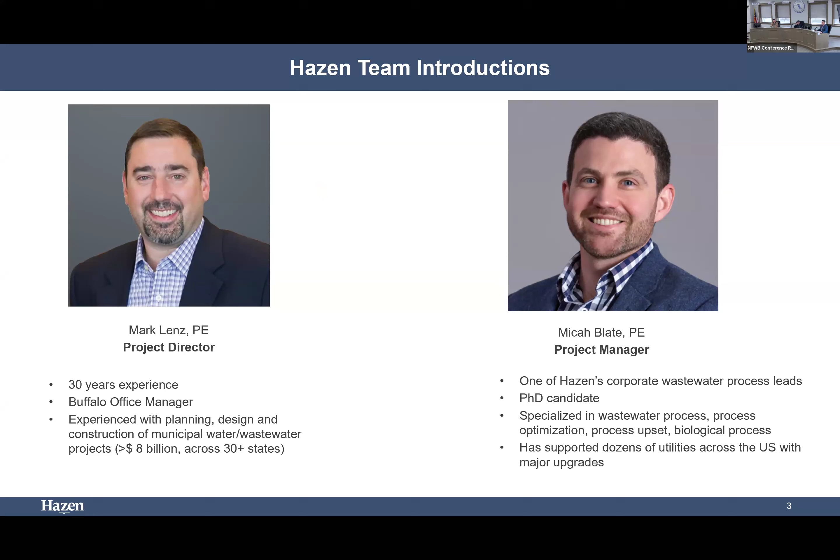Just a little background on Hazen. We are 2,200 people nationwide. All we do is drinking water and wastewater work. So the whole company is filled with people who are doing projects very similar to this across the country. Moving forward onto tonight's discussions. If you click forward a couple slides, in terms of the overview, just from the schedule perspective, Micah will talk about the overall project, but we've reviewed all of the existing information that was compiled over the last 8+ years, which was very useful. There was a lot of hydraulic modeling done as well as mixing modeling to help identify solutions here.

We did bench testing, really appreciated the opportunity to work with your staff, both in the collection of those samples as well as using the lab space to analyze them. Hazen also maintains a lab on Manhattan University's campus, and so some of the more specialized testing was completed there as well. All of that resulted in an alternatives analysis. The report is sitting in front of Sean, so you can see it's quite lengthy. And with that, I'll hand it over to Micah and he'll talk through things so that you don't have to read the whole report if you don't want.

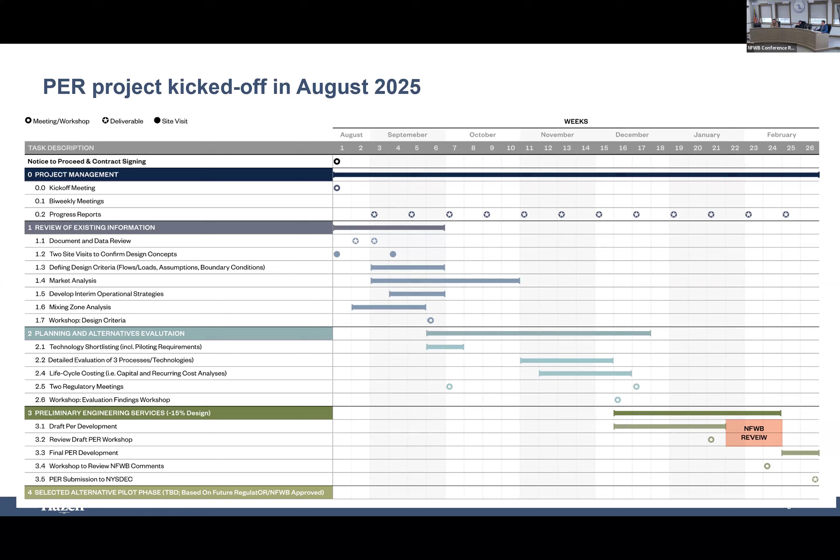All right. Thank you, Mark, and thank you everyone for the time this evening. So like Mark said, we started the project in August 2025, working towards submitting the document there in front of Sean in late February. So the primary challenges with the wastewater treatment plant today are, one, there's two influent sources of varying quality and flow. So pollutant loading and flow are quite different. The sulfide cycling, which we'll spend some time discussing here in a few slides, is challenging and causes the visible contrast. The wet weather peaking leaves no redundancy, so how many units we can take offline is challenging during wet weather peak conditions.

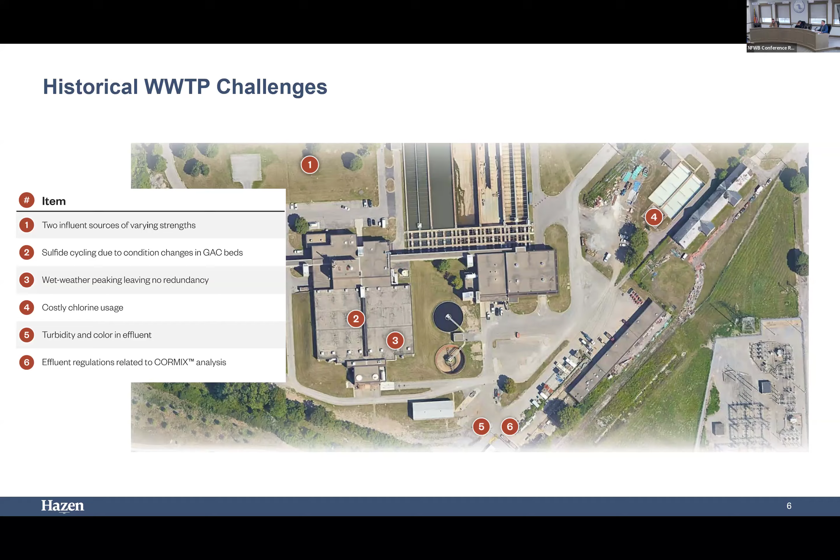Chlorine usage, which I have a slide on at the end of the presentation, has gone down significantly, but historically, it has been quite expensive. Of course, you all are aware of the turbidity and visible contrast in the effluent. And we'll talk about the CORMIX at length here in a few slides.

As you all are aware, the consent order has some major challenges with it. The existing facility is a physical chemical treatment facility, meaning that it does not currently have biochemical oxygen demand limitations. The new permit has that limitation, in addition to many other parameters of varying quality and type that warrant some major improvements. So in addition to the BOD addition to your permit, a number of other things have been added.

Total sulfides is a new one. Dieldrin and cyanide are also new. But in addition to that, the DEC has proposed decreases in some other water quality parameters, namely WET testing and PCBs, along with changing the frequency the parameters should be tested.

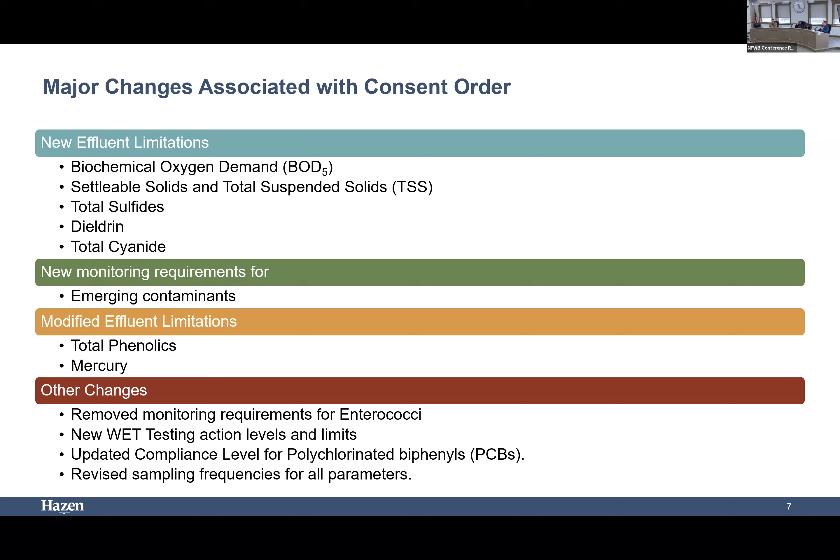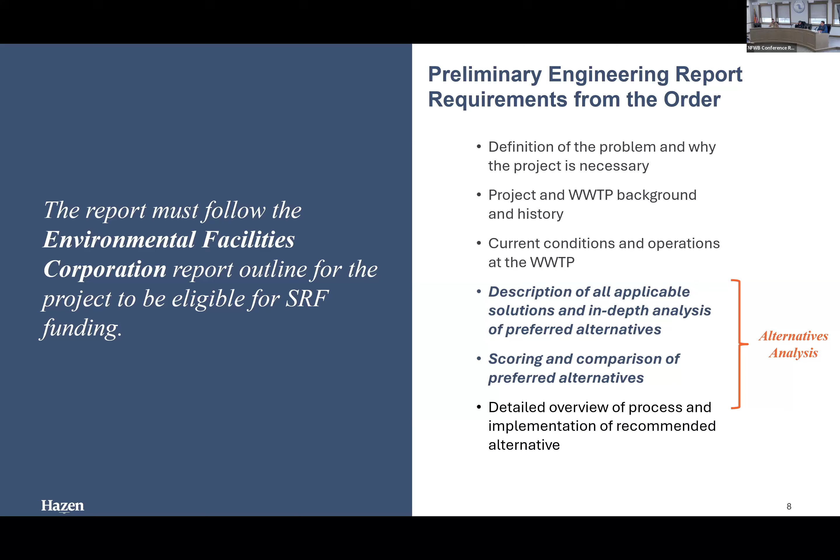So the preliminary engineering report was stipulated from the consent order to contain certain things. You can see kind of the outline of what was required in the PER. What we'll spend a lot of time on today is discussing the alternative analysis, how we went through the analysis, ended up on 3 alternatives, and finally recommending a single alternative. So we'll work through this together tonight.

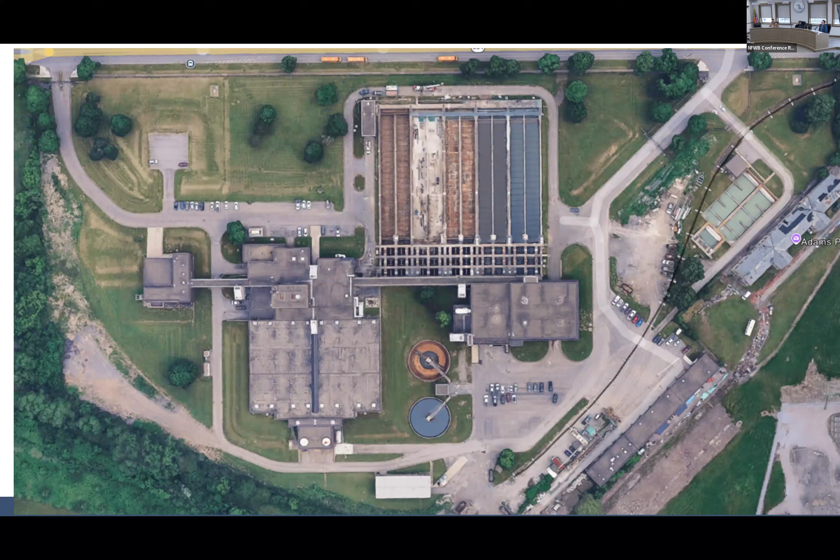Like I said, we submitted the report February 27th, a few months ago, to the DEC, and we're just awaiting comments from them at this time. So this is a current aerial of the wastewater treatment plant. What we are proposing is what's called a moving bed biofilm reactor. It's moving really slow, sorry about that. Coupled to a disc filter.

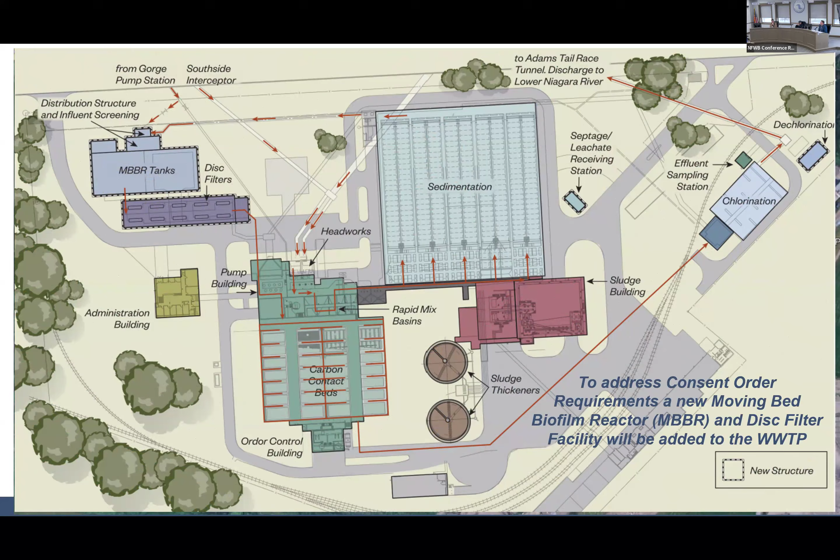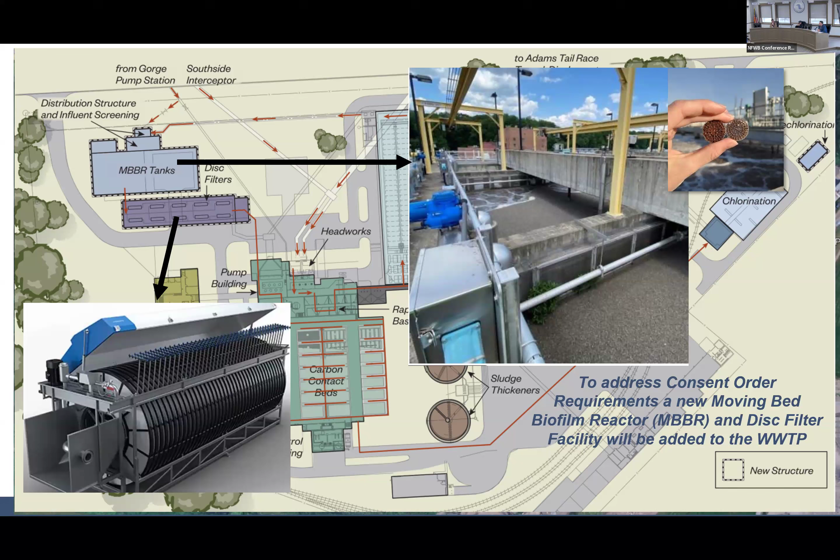So you can see what it would look like in the future. MBBR on the top left of the screen, followed by what's called a disc filter for solid separation. And just kind of popping up from there is the MBBR tank. You can see there's some little waffle looking things. That's what the microorganisms grow on, and it goes inside a tank that looks like that. And that's a picture of what a disc filter is.

So jumping right into the project details, we broke this up into 3 phases. Phase 1 was what we call just a baseline understanding, getting to know the plant, understanding what's already been done. Like Mark mentioned, there's been a ton of work already done, so we had a good starting point. So we reviewed historical information, conducted staff interviews, went through 4 or 5 years of historical data, did a condition assessment, development of design flows and loads. CORMIX modeling is a big piece of this. We'll get to that in a few minutes.

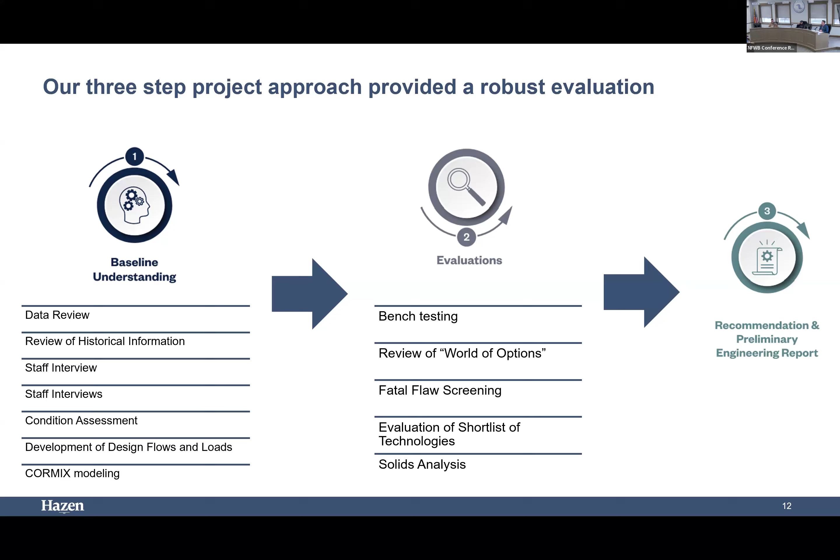Phase 2 is where we had a big list of what we call a world of options of technologies or processes that we kind of refined down to the final analysis to make the recommendation. Okay, so there's been a ton of work already done. So thankfully, we had a great starting point. Most recently, AECOM had done a 2019 report looking at basically the biodegradation potential of the influent wastewater, and that ultimately recommended a membrane bioreactor.

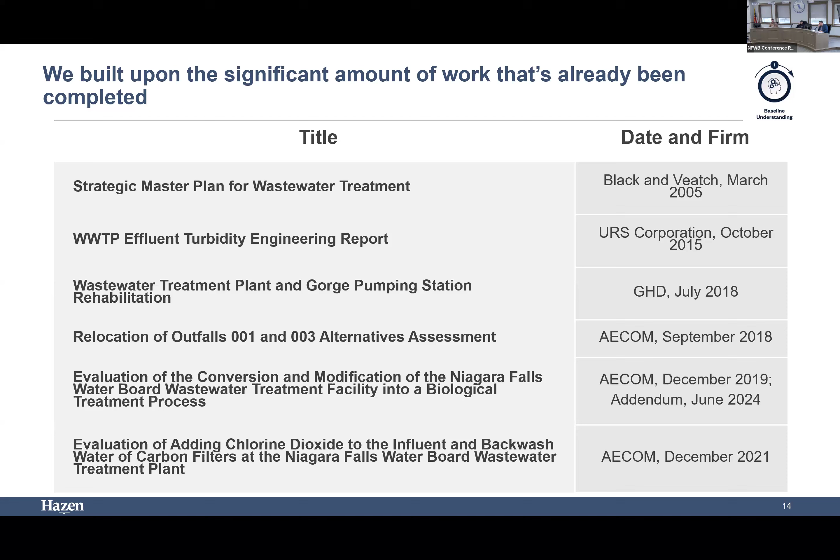And a number of other studies as part of the consent, but even going back to the early 2000s, Black and Veatch had done the strategic master plan for the wastewater treatment plant. And we used a lot of this information. I mean, we built on what Black and Veatch did, a lot of the alternatives that they had defined. We kind of looked at those same alternatives. So interesting to build on what's already been done.

The draft SPDES permit does require maintaining the granular activated carbon beds. This is a huge deal. Firstly, like I mentioned, this is a physical chemical treatment plant. There's no biological treatment intentionally happening. So we need to add a biological step to get rid of the biochemical oxygen demand as step one, but we also need to get rid of a number of other parameters.

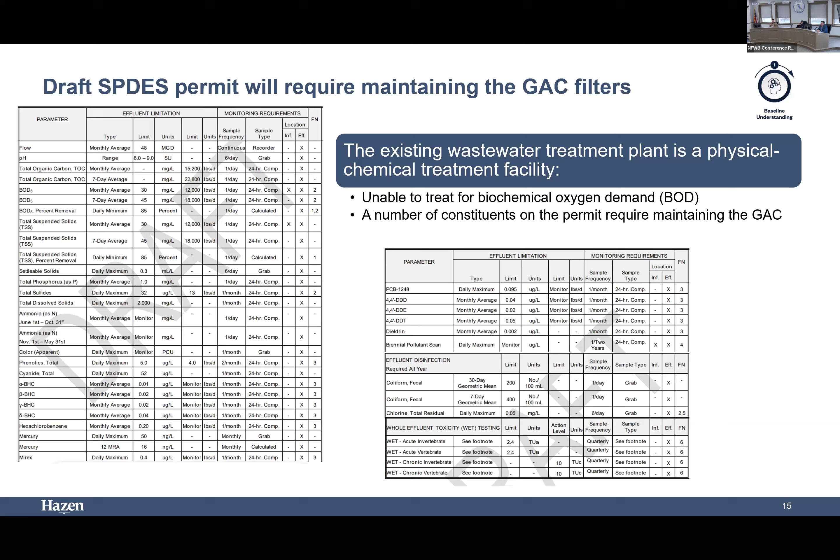And this is really part of the foundational understanding of the plant. You know, we don't want to over-design the plant. We don't want to under-design the plant. So this is one of the building blocks as we start building this project. What is the basis of design going to look like? So this is a key part of what we do.

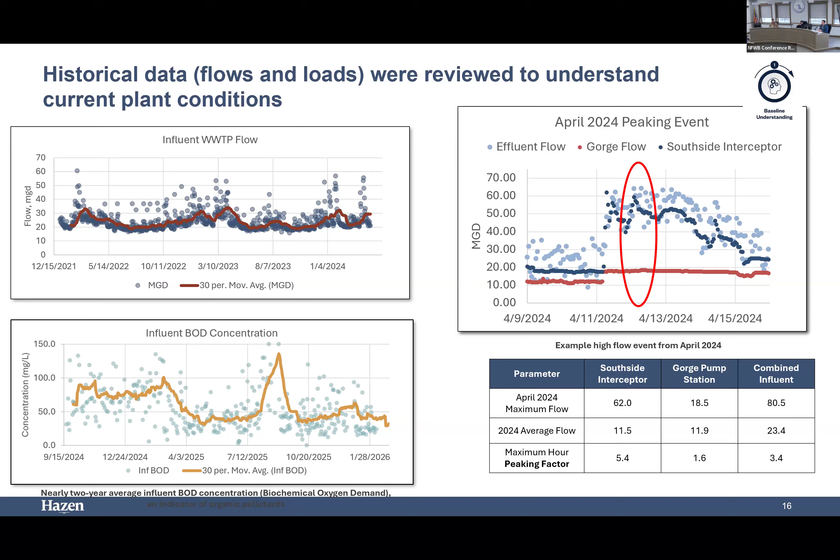Did I? Try it one more time. There we go. Oh, there it goes. Okay. Oh, oops, sorry. Two more times. Sorry. Okay.

Okay, so like I mentioned, there's two influent sources. One is pumped, which is from the Gorge pump station. It's the Gorge force main. And then there's a gravity influent sewer. So this is a key point of this exercise and this preliminary engineering report: the fact that these two influent sources are so different.

So that makes sense. The other really challenging part of this is the fact that the gravity influent sewer is significantly stronger from a pollutant perspective. So that's a good and a bad thing, because on one hand, we're able to leverage the fact that one's weaker and bypass some of our treatment system. On the other hand, we have this gravity influent sewer that's stronger. So what infrastructure is required to treat this because it is stronger?

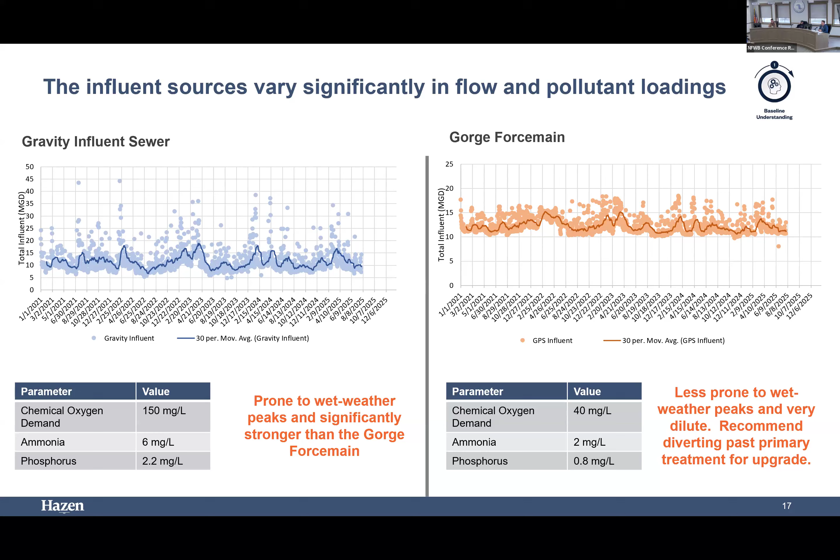So in addition to all of the data and information that we reviewed, there's also a number of parameters that aren't typically analyzed by the plant. So we performed multiple weeks of special sampling with the Niagara Falls Water Board staff. Thanks to the staff for supporting that effort.

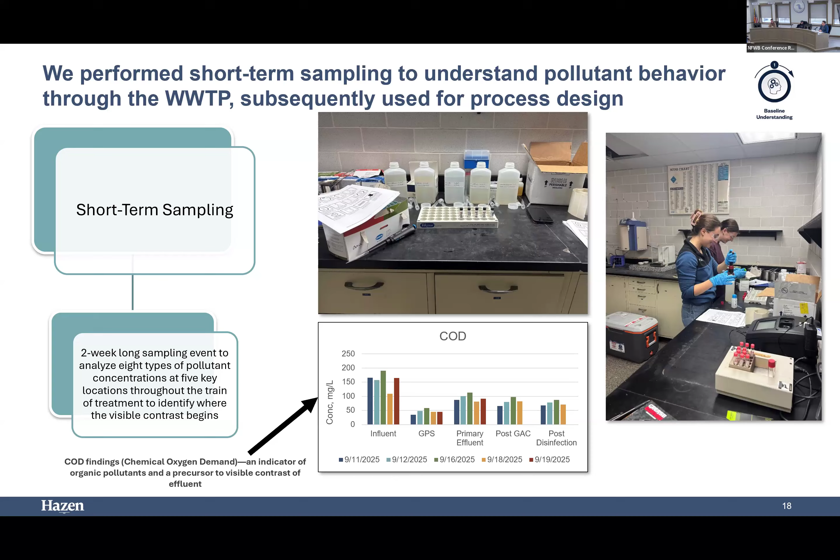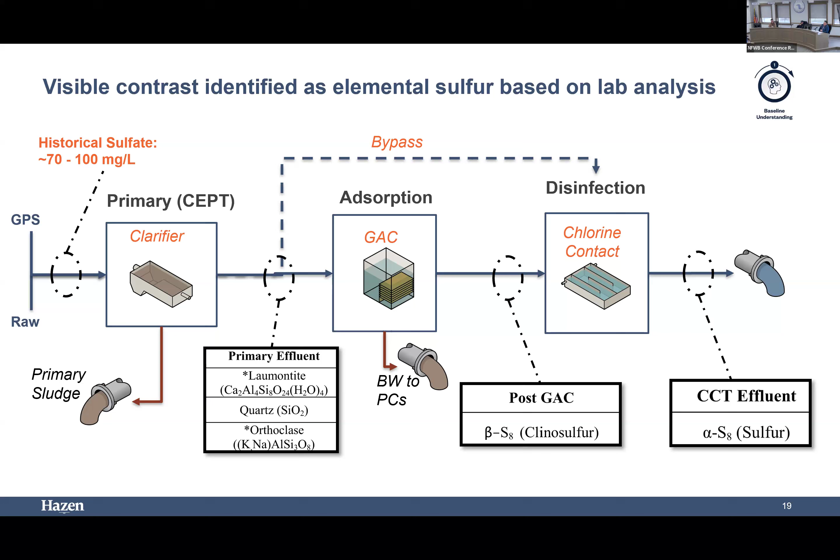So one of the key things that we really wanted to understand is what is causing the visible contrast? Why is the color so different from the effluent compared to the Niagara River? So ultimately we collected samples throughout the plant at a few key locations. Here you can see them. Don't worry about what it says, but ultimately we collected three key location samples,

and what we found is that the GACs are going what's called anaerobic. They run out of oxygen, and it's producing an environment prone to grow what's called sulfate reducing bacteria. And what this bacteria does is it takes influent sulfate and reduces it to sulfides. And if you recall from the SPDES discussion we had a few slides ago, total sulfides is now proposed on your draft permit.

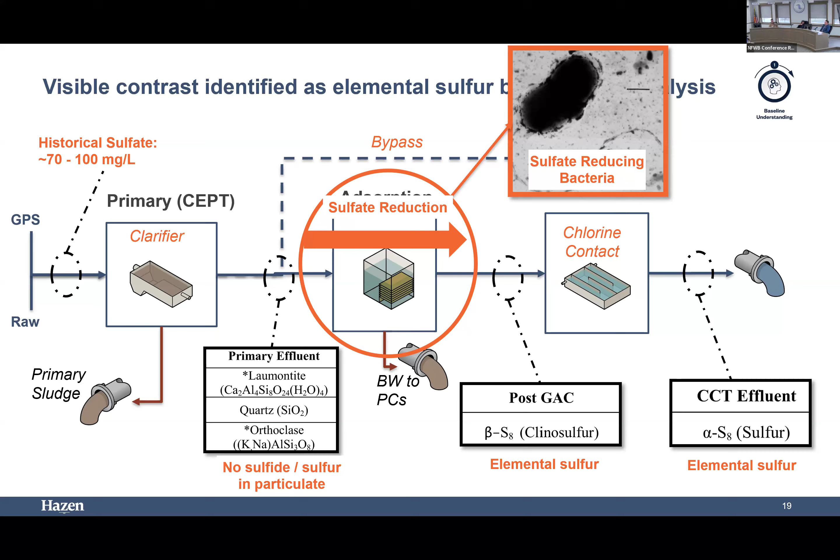So what we found is that in the influent you have some sulfate; as it goes through the plant, it remains as sulfate till it gets to the GACs. The sulfate reducing bacteria then convert it to sulfide or elemental sulfur. And you can see the color of the visible contrast in the chlorine contact tanks in that case.

So these sulfate reducing bacteria are interesting organisms. To grow, they basically require an environment with no oxygen and carbon availability, so they need carbon to grow. And unfortunately, influent wastewater has carbon. And obviously it requires sulfate. So how do we manage this?

Number one, we need to maintain an aerated environment in the GACs. Number two, we need to treat the carbon that goes into the granular activated carbon beds, so we need to bring the pollutant loading down before it goes into the GACs. And finally, we have the potential to reduce sulfate going into the facility by implementing sulfate on the IPP, industrial pretreatment program. Another way to reduce the potential sulfate reduction is reducing how much sulfate comes into the plant.

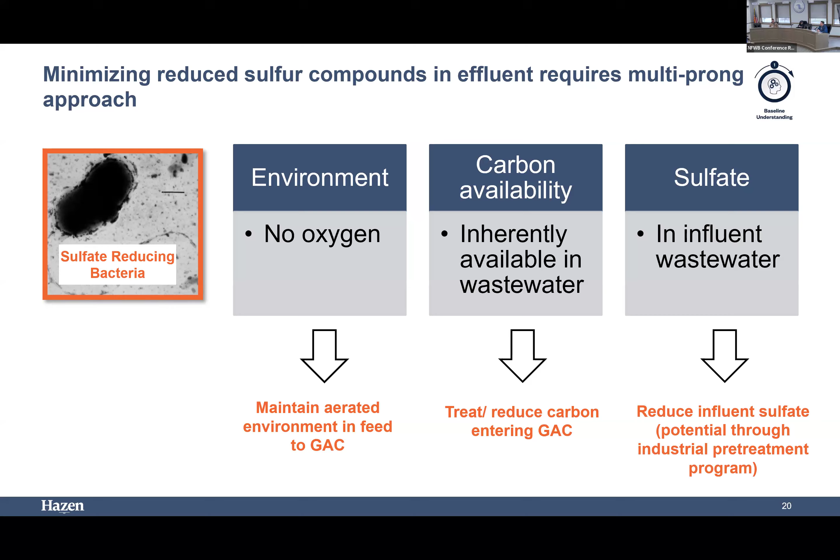Another thing that we did is a condition assessment. And this is really important because we wanted to identify deficiencies to be coupled to the major upgrade at the plant, because you don't want the rest of the plant to be falling apart while you have this major upgrade. So the idea was that we identified deficiencies throughout the plant so that they could be included in this project, so everything's starting at the same point.

So I won't talk through each one of these, but we looked at each system: primary treatment, intermediate pumping, and carbon treatment. And a couple key things that we found are the GAC beds need replacement, so all that carbon needs to be removed and replaced, and some other pumps and stuff. But this is all included in the costing because, like I said, we want to make sure that you have a plan that's going to serve Niagara Falls Water Board the best in terms of providing a long-term holistic strategy.

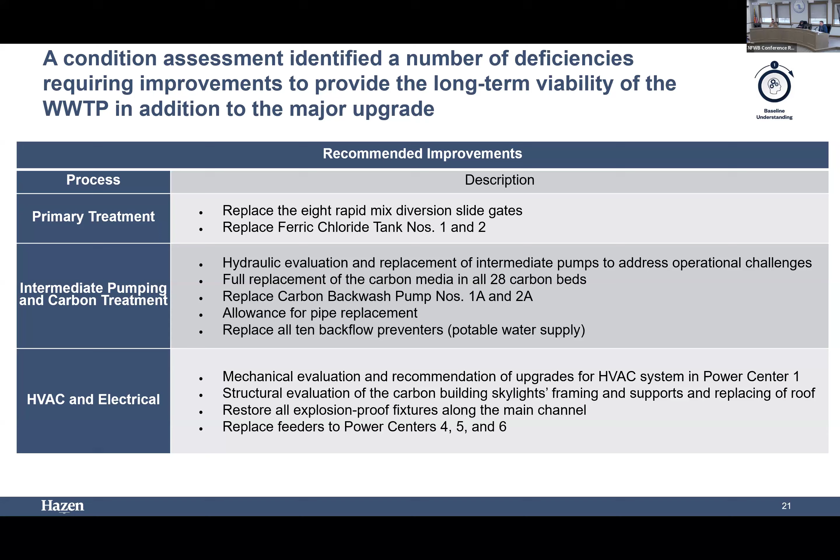Another few big challenges associated with this model: number one, there's a number of assumptions made on velocity and cross-sectional area of the river, which impacts how much dilution you get, which impacts your BOD, your WET and other parameters. So they use these assumptions to identify a number of these parameters.

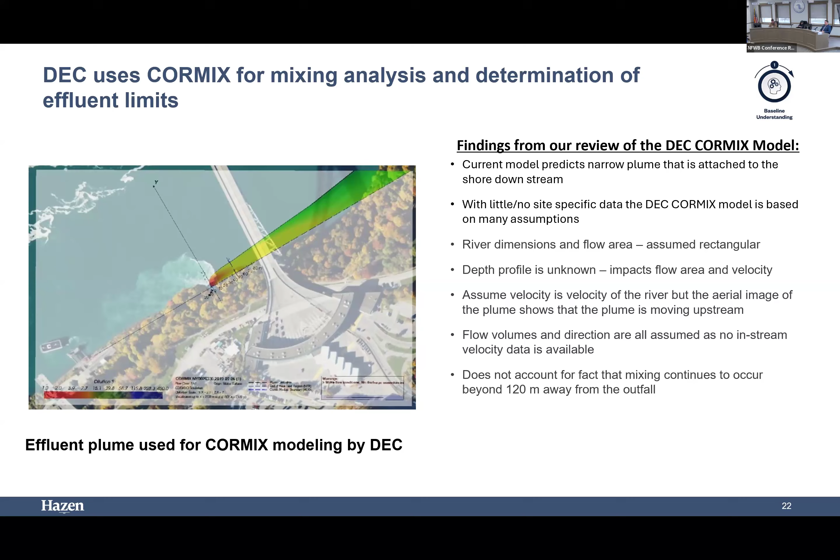And so what we did is we took their model and we updated it. So you can see on the bottom left is the updated CORMIX model. So now it's going upstream towards the falls. And we took Google Earth. On Google Earth, you can go back in time. So we took a couple snips back in time, 2002, 2015, and 2023. So for the last 25 years or so, the plume's always gone upstream. So number one, we wanted to make sure that we captured that in the updated CORMIX model.

And then we used some of the same assumptions and did some sensitivity on the DEC's assumptions in terms of velocity, depth, so on and so forth, to look at what the updated dilution factors would result in terms of total residual chlorine and the WET updates.

Maybe explain what WET is. Oh, okay. So WET is a test that looks at whole effluent toxicity. It's basically the toxicity of the effluent in relation to organisms growing in the river, right? So you can see there's vertebrate and invertebrate. So based on chronic and acute dilution factors, it basically looks at how things would be impacted in the river. So the permit requires this testing to happen, what's called WET testing.

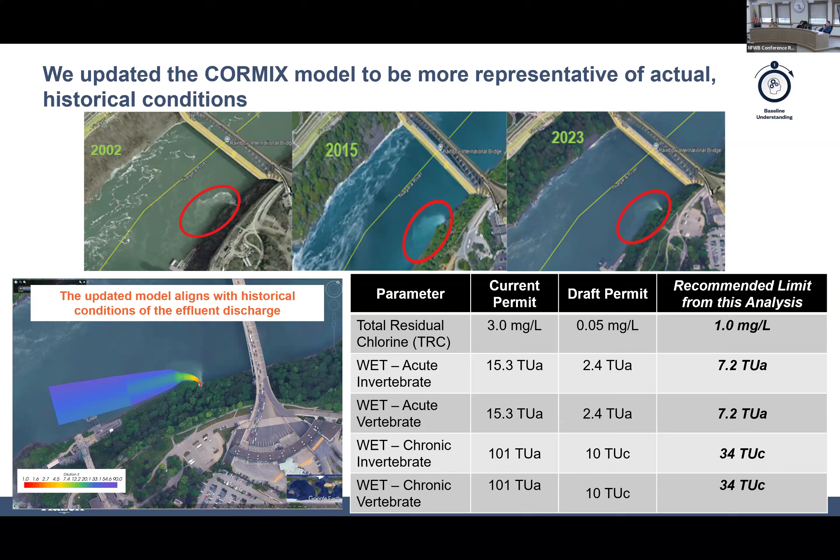So anyhow, your current permit has a 3, for example, on the total residual chlorine, 3 milligrams per liter. The DEC on the draft permit has 0.05 milligrams per liter, which is effectively 0. So our analysis recommends a TRC limit of 1 milligram per liter. And we did the same thing for each one of these parameters based on the updated modeling.

So the primary findings from this phase of work that we move forward with into the next phase of work are, number one, the 2 influent sources have very different characteristics. Number 2, the CORMIX model was used and updated to identify new recommended SPDES permit limits based on updated dilution factors. You need to maintain the GAC filters because of the industrial components in the wastewater, and elemental sulfur is responsible for the visible contrast in the effluent.

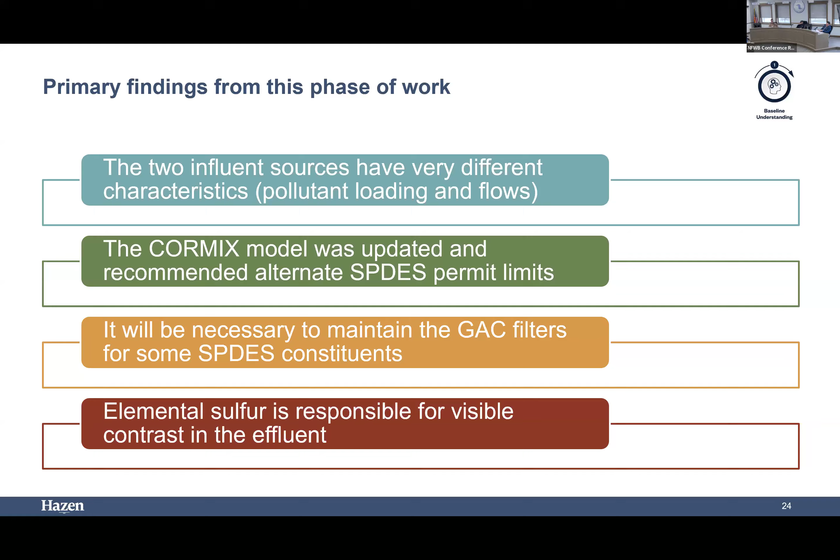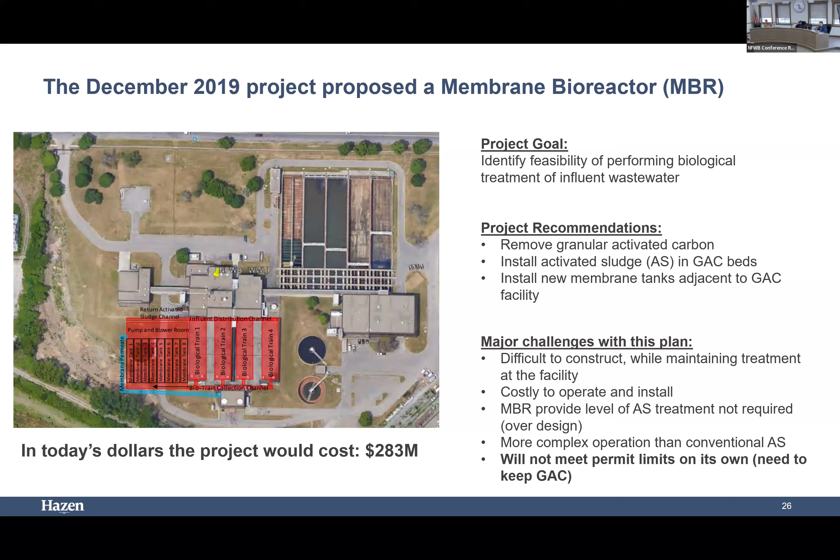You can see this is going into an operating facility. So it would be challenging to construct this while maintaining your current treatment ability. It's going to be costly to operate and install. And membrane treatment provides a really high level of activated sludge treatment that's not required for your permit in terms of nitrogen, phosphorus, so on and so forth. And it is quite complex compared to what you have now.

They're a great technology. It produces a very high quality effluent, removes nitrogen, phosphorus, total suspended solids, and it allows you to operate at an intensified level compared to conventional treatment strategies. So you're getting a lot done in a smaller footprint.

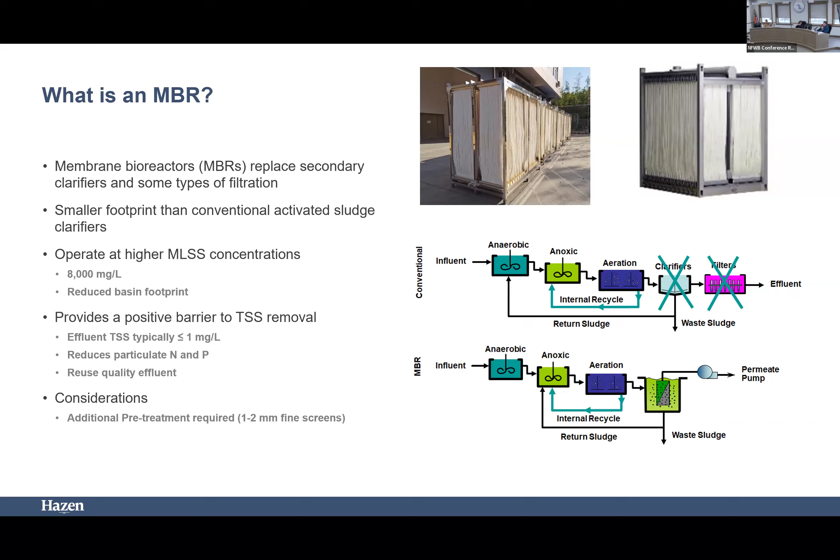There are some challenges. There's a lot of pumping, and you need a lot of additional equipment, cleaning equipment for the membranes. You have to clean them periodically, and you need fine screens. So a lot of challenges and maybe unnecessary for what we're looking at, since there are no nitrogen phosphorus limits, only biochemical oxygen demand.

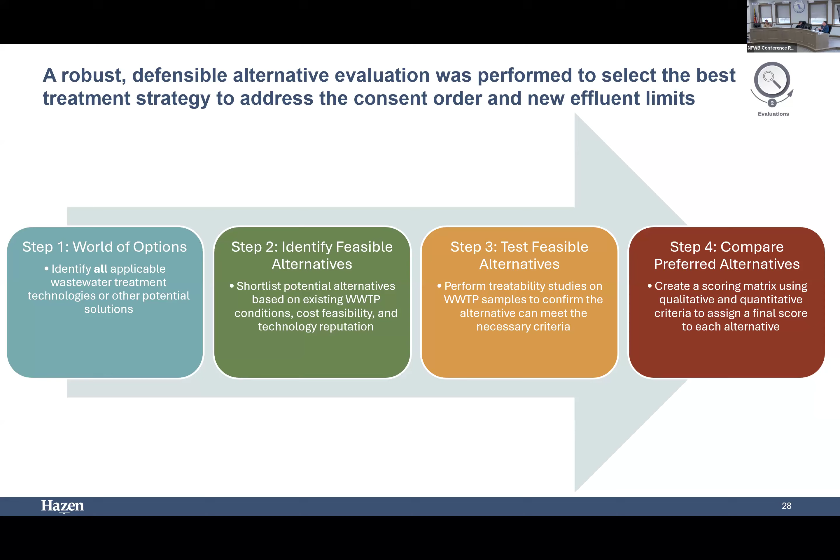So we came up with a strategy to provide a robust and defensible alternative evaluation to identify the best treatment strategy to address the consent order. I mentioned the world of options. We'll walk through how we shortlisted that and got to the final alternatives. We did some benchtop testing at our lab. Mark mentioned we have a lab at Manhattan University. So we sent some samples to the university, did some benchtop testing there, and then we did a whole modeling, desktop evaluation, costing, life cycle analysis of these technologies against one another.

We started with what we call the world of options, and we put them into buckets. So bucket one is what's called the physical chemical treatment. This is basically expanding what you have now. Right now you have physical, the primary clarifiers and the GACs, and you have chemical, you add ferric to the primary clarifiers. So bucket one is just expanding that to meet the BOD limits.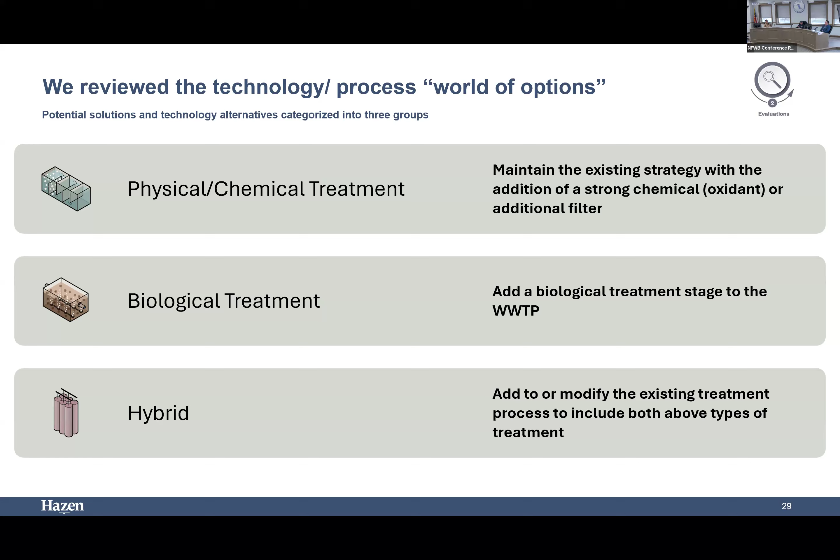The second bucket is biological treatment. And finally, the third bucket is a hybrid where we combine the physical chemical with the biological to potentially reduce new infrastructure requirements. So each bucket had multiple technologies. Physical chemical, we have a chemical oxidant. You all are familiar with chemical oxidant. You currently use chlorine. Chlorine is a disinfectant, it's considered a very strong oxidant. Membranes and ion exchange fit into that bucket.

Biological treatment, we'll talk about these in more detail, but there's a number of different ways to achieve biological treatment: activated sludge, biofilm, enhanced primary treatment. We'll talk about most of these, and then a hybrid strategy where we combine a membrane with a reject water treatment.

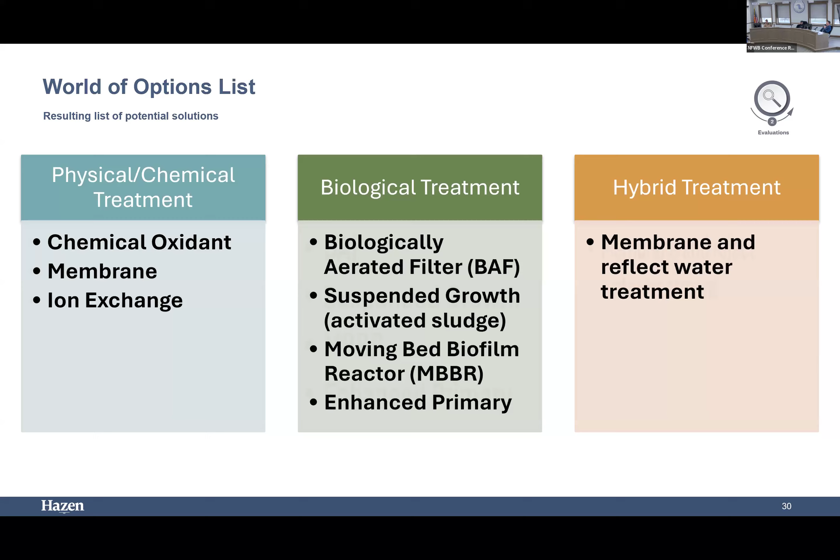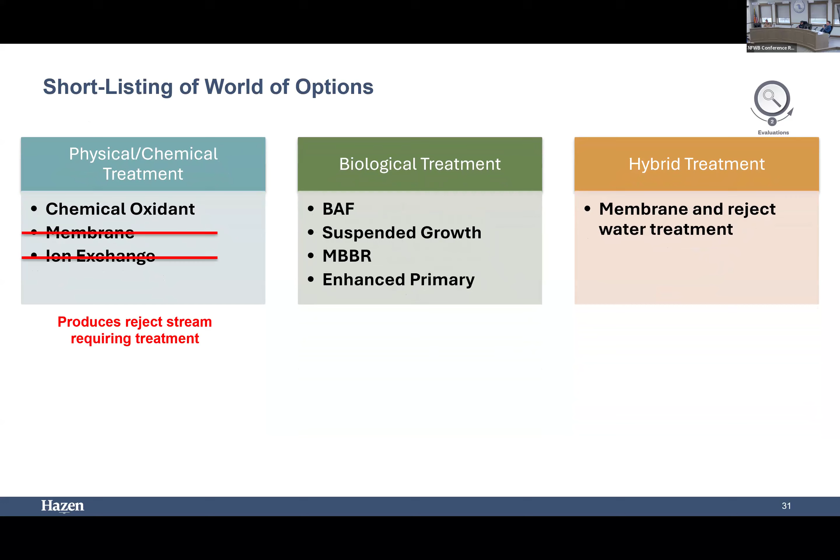So step one was to shortlist the technology list. In the physical chemical treatment bucket, we removed membranes and ion exchange. Both of those produce a reject stream requiring further treatment. So we're left with a chemical oxidant. In the biological treatment bucket, we have suspended growth and enhanced primary. Enhanced primary has limited US installs.

Suspended growth requires some sort of solid separation step that can be achieved in a much smaller footprint that the BAF and the MBBR can do. Sorry, I should have said BAF stands for biological aerated filter, which we'll explain in a few slides. So we're left with those two alternatives, BAF and MBBR. And then the hybrid treatment, we have nanofiltration coupled to some type of reject treatment strategy.

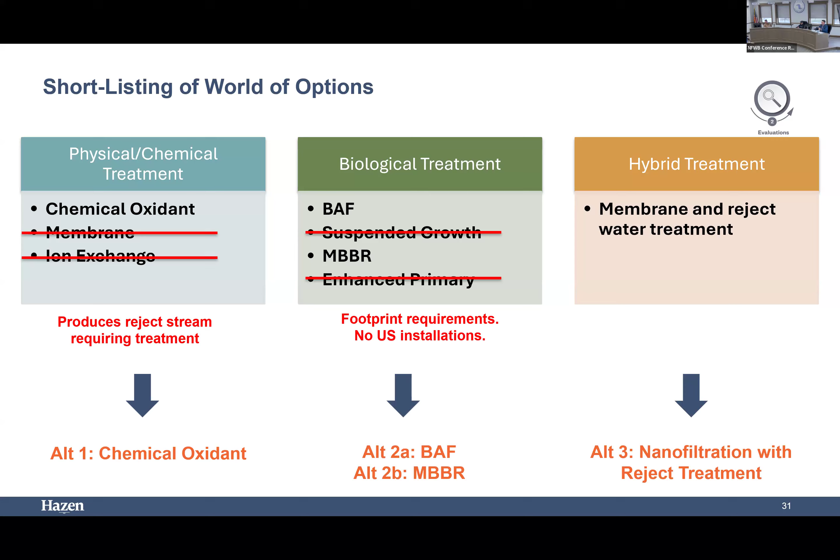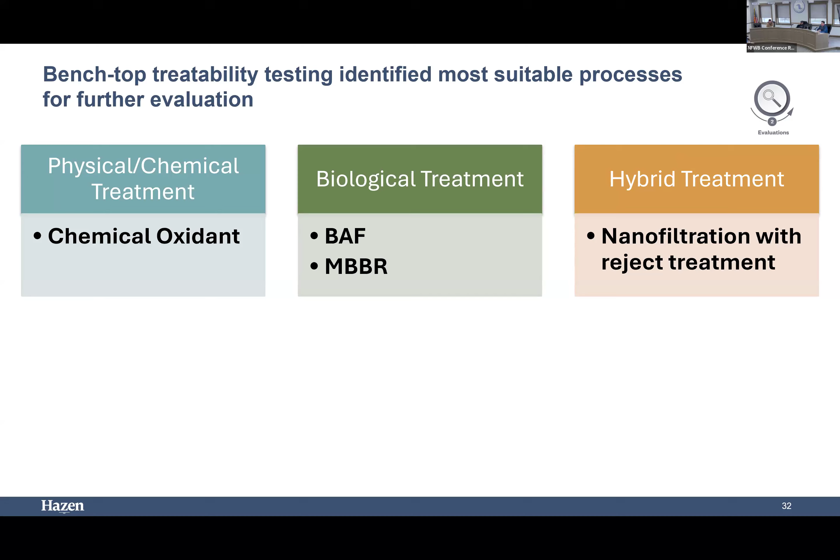Okay, so like I mentioned, Niagara Falls personnel took samples at the plant and shipped them to our lab at Manhattan University. And we did a number of different tests. We did ozonation testing. So we applied ozone, which is a very strong oxidant, to identify how much pollutant removal would be seen at a reasonable ozone dose. We found that not enough ozone could be provided to reduce the pollutants to a level that would meet the permit limits.

The hybrid treatment testing determined that the nanofilter does not provide sufficient pollutant removal, and also it requires reject water treatment. So twofold on why it didn't make it to the final list. So what we end up with is the biologically aerated filter and the moving bed biofilm reactor.

We visited a BAF as part of this exercise. Niagara Falls and Hazen went to visit a facility to talk to the operators, understand the operation of the system, understand the performance of the system. There's a number of these throughout the US. Nearby, besides the one we visited in New York, there's a very large one in Maryland. It's about two times the size of the facility here. It's been operating for decades now.

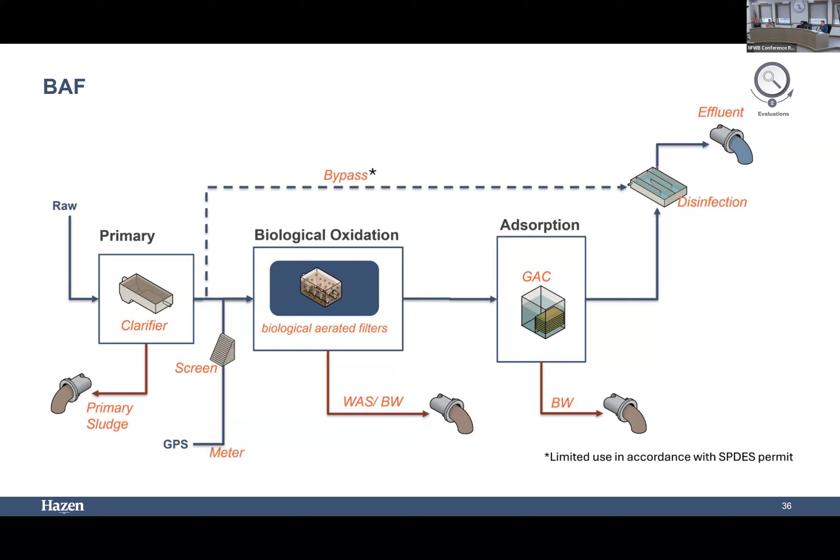Then all the combined flow goes through the biological aerated filters. I think we need about 7. We have a slide to show how many we need. The biological aerated filters do produce a waste material. You have backwash now, similar to the GACs. There'll be some sort of backwash that you need to waste periodically. And then flow would continue onto the GACs, which is required, as I mentioned, for the permit limits.

The existing intermediate pump station, as part of the condition assessment, we did identify that this may require upgrades in the near future. It's at the end of its useful life. So not really a waste in installing a new intermediate pump station. You're needing it anyhow. So we're just moving the location. And the other thing is we're taking advantage of your existing asset. We were putting backwash supply water into primary clarifier number 1.

So like I mentioned, we did a full life cycle analysis. We looked at how many operators would be needed, how much energy is required, how much chemicals required. And here's the findings. You can see the energy there, 3.5 million kilowatt-hours per year. Approximately 2 new operators required. So on an annual basis, O&M is about $1.3 million per year for this system. And the next thing that we did is a capital cost estimate.

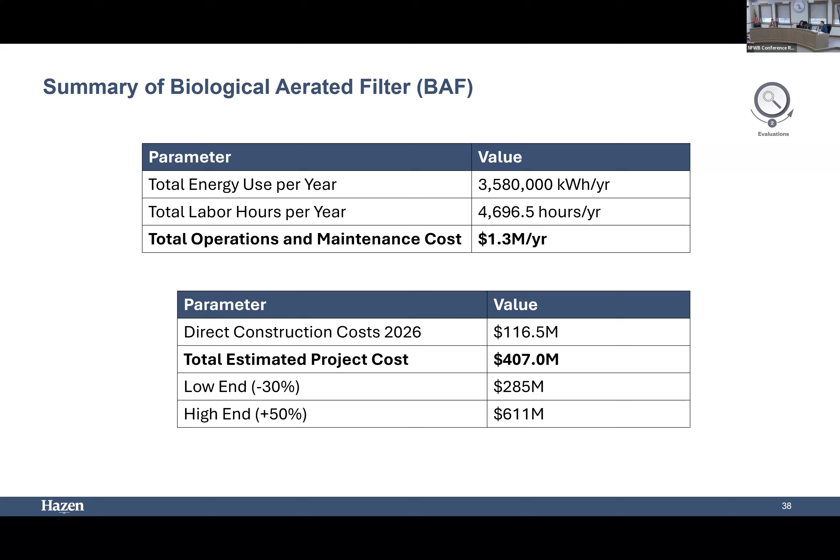Now, are you recommending this one? We are not. Oh, okay. We'll compare them apples to apples. The other thing that we did is we developed a life... Maybe you should just concentrate on what you are recommending. Okay, you want me to jump ahead? Yeah, sure. Fine by me if the board would like. Does anyone want more details on what they're not recommending?

No. See, we talked about this briefly last month. And the two questions I had, and maybe some other board members have other questions, is you get a shot at this once every 50 or 60 years, hundreds of millions of dollars. Show us why we're going to be picking a particular one. Okay, usually when you upgrade, the general rule sometimes is you reduce costs, usually.

Okay, and one of the problems we have is, and I know there's some trucking involved, but the sludge waste, which keeps on escalating for us. So I want to know what is your system that you're going to recommend do? And what can we do with the sludge? I mean, if we're going to upgrade a project that's going to last 50 plus years, try to convince me why we're doing this. Or not me, I mean the board.

Yeah, of course. No, that's a good question. I mean, I think the point of the slides were to walk you through how we got to the recommendation so that you can see that we did a kind of a defensible exercise, right? So the major challenge with trying to reduce costs is that the DEC is asking you to add a number of limitations to your permit that you don't currently have. So there will, unfortunately, be operating costs that you don't have right now that will be added because of what the DEC is requiring you to do.

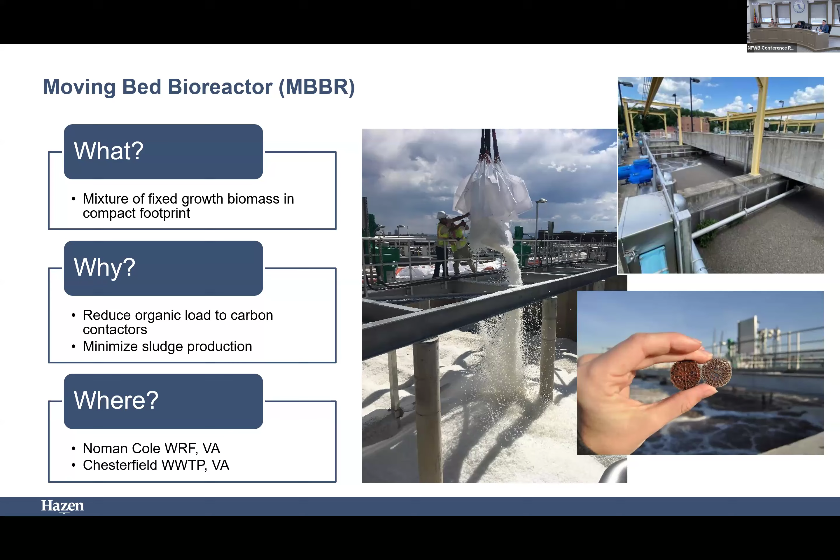That's why we had multiple meetings with the DEC on this, and that's why we went through the CORMIX analysis on our own to show the DEC your limitations are overly stringent based on what we're seeing. So, for example, the TRC they're recommending is 0.05. We're saying it could be 1 based on our analysis. But if I recall correctly, Sean, we've been at it for years trying to convince DEC to change those limits. And there's very slim possibility that they're going to change that.

So the draft SPDES permit contains new limits. Water quality standards are evolving and they're getting tighter over time. So some of these changes are going to happen no matter what. You know, we're going to see a BOD removal limit. It's unavoidable. Every other plant is going to have them or has them already. We're unique in that we're currently a physical chemical plant, but we just don't have means to treat for BOD. The exercise over the last year or so since the draft permit came out has been to revise how tight some of the limits are going to be.

If the limits are as tight as proposed, they're going to require, among other things, tangibly a dechlorination facility. We might be able to operate the recommended process with our existing chlorination equipment and controls and meet one, which is what is being recommended, what we're asking for as part of this preliminary engineering report based on the CORMIX modeling that Hazen and Sawyer and their consultant performed, and some other factors that are discussed in the preliminary engineering report. If DEC accepts that, good.

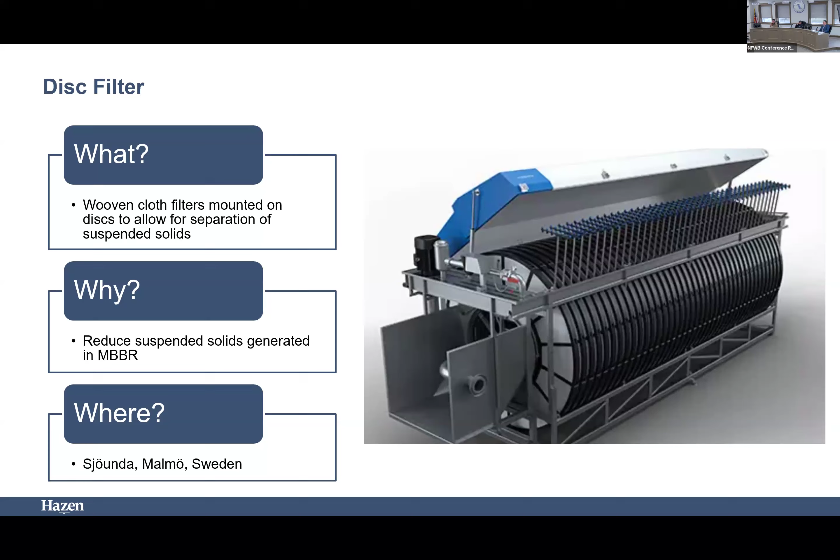Good. So if I understand you correctly, the recommended solution does not address the limits being proposed by DEC? What it addresses is what we're requesting changes from the DEC. No, I believe that the estimates include dechlorination facilities. Yeah, so the ultimate project cost, should DEC agree with the proposed effluent limits that we're putting forth with backup in this preliminary engineering report, will eliminate certain components. For example, the $15 million that's currently part of that project cost for the dechlorination facility goes away.

But as of right now, their assignment was to develop a preliminary engineering report that complies with what DEC has, the world as it is today. Okay. So we're hoping for some relief, but it's not going to be relief that slashes the operation cost in half or anything like that. It's going to help, but it's not going to eliminate the big picture things, the BOD removal that's really driving most of the cost of the upgrade.

If we're looking at a $1 million plus increase in operating costs, with not a lot of industry anymore, and who knows the future of industry, how is this going to affect our budget to continue to run without passing it on to residents or contract negotiations? That's a big hit. If we looked at those numbers, Sean, one plus million just in operating costs in today's dollars, and that always increases every year.

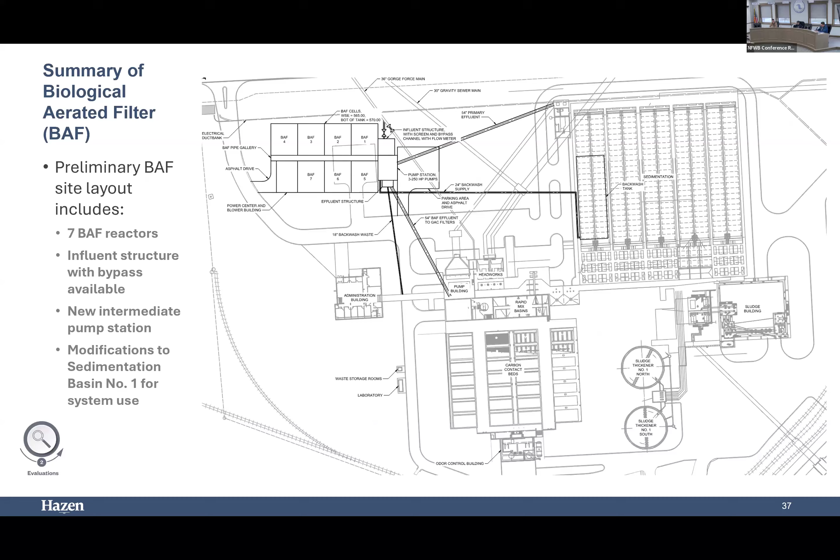Yeah, it's a great question. Let me jump back and talk through the alternatives very quickly. This is going to be the most efficient and lowest cost operationally of all the alternatives that can treat for biochemical oxygen demand, like Sean mentioned, BOD. With chemical oxidant, you're going to have a recurring chemical demand, and it's going to be quite costly. It's going to be more costly to construct, and there are limited US installations of that. So I feel that one will be significantly more expensive.

Comparing the biological aerated filter and the moving bed biofilm reactor systems, the MBBR will be more efficient from an energy perspective, and it will be more operationally friendly.

There'll be less operational inputs required, less instrumentation, so on and so forth. So less recurring O&M in that sense. The hybrid system, no US installations. Again, you're going to have two treatment systems. You'll have the filter membrane nanofilter. So there's more pumps. You need a pre-filter and chemical and biological treatment.

So I say all that to say that this is going to be the most efficient system. So we did go through a full exercise of looking at what's going to make the most sense for you all. And certainly based on all what we know today, MBBR is certainly the most applicable technology that's going to be the easiest to operate, the cheapest to operate, and the cheapest to construct. Okay. Thank you. Yeah, good question. Thank you.

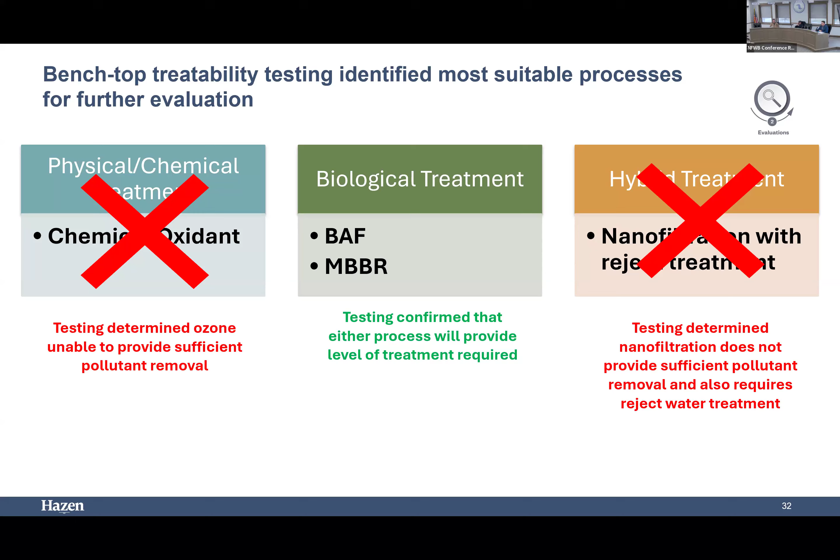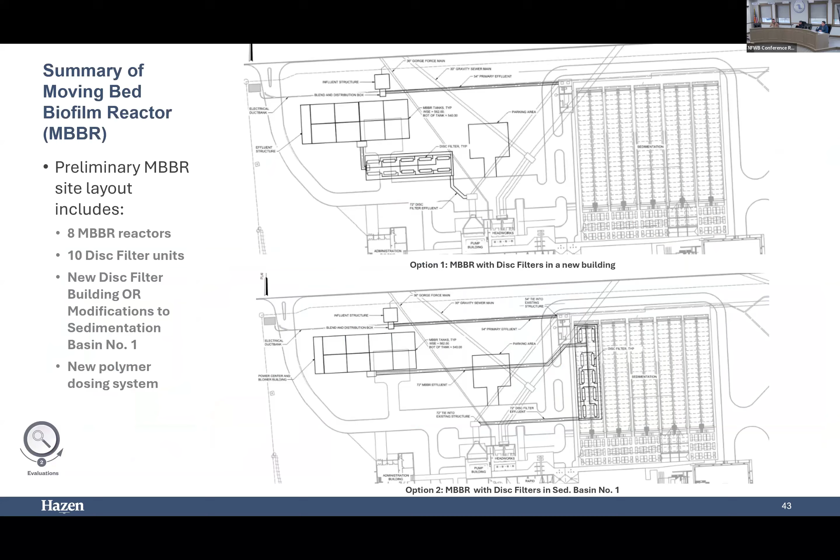I think, Sean, should we just jump ahead to the recommendation maybe? You've got a life cycle cost. Oh yeah, let me show you the life cycle costs for the MBBR. Yeah, so similarly, energy is more efficient. You can see it's 5% less. Total labor hours are less than the BAF. So on an O&M perspective, 1.1 million compared to 1.3, it's still 15% savings comparably, which does add up.

Does this also include the same thing? It does. So the BAF, it was 160,000 a year, the intermediate pump bank. It's 100,000 a year for the MBBR. And the reason for that is because with the BAF, we have to raise the water to a higher elevation to work through the BAF. And so I don't know exactly what the current costs are for the intermediate pump station. The majority of the costs that we're talking about are new. All right, thanks for explaining that.

And then of course, we have the capital costs on the bottom. So there's the direct construction cost. So this is actually what it costs to build the system, but the total estimated project cost underneath it is significantly higher, as you can see. So that's going to include all the overhead and profit of the contractor, the design engineering cost, insurance, legal expenses. What else am I forgetting? Contingency, on all the things that we can identify as of today, right?

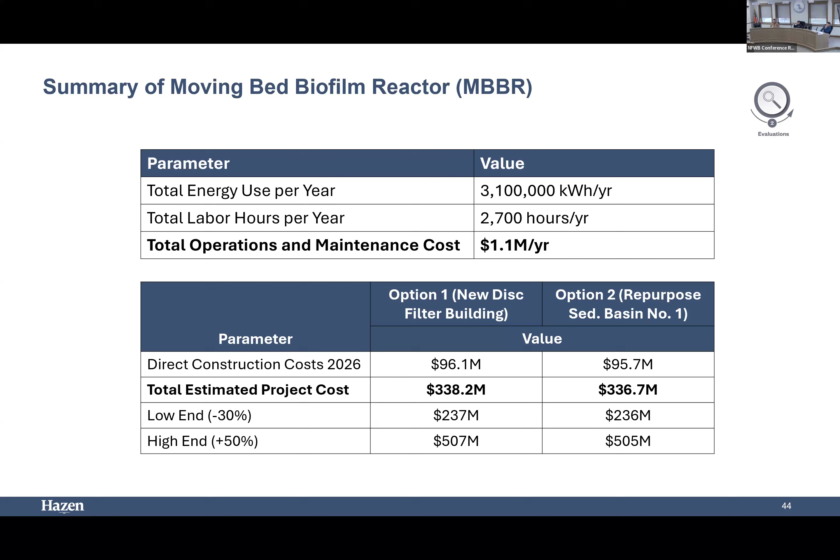But starting in 29, was it? Yeah, because you have 2 years for design, then 4 years for construction. So it would be 2030, 2031. Oh, okay. Thank you. Yep. Just a comparison of all the alternatives. We talked through that, so I'll just jump ahead.

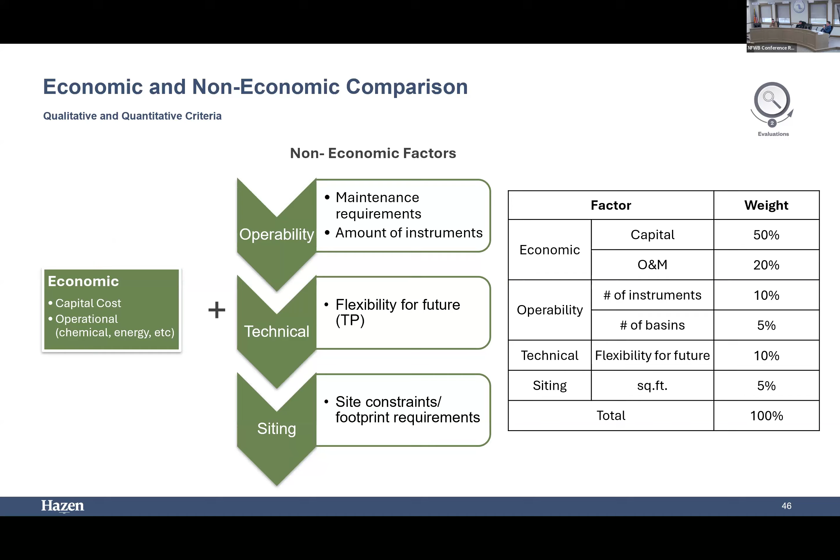The other thing we did, we also did a non-economic evaluation looking at ease of operation, number of instruments, number of basins, thinking about how much operation input would be required, flexibility for future, and siting. So with Niagara Falls Water Board staff, we came up with weights for each of these buckets, economic, operability, technical, siting, in addition to the costing. And ultimately, MBBR resulted in the highest score. So MBBR has the lowest cost, is the most operationally friendly, less complex to construct and operate, and it scored the highest as well.

Okay, so obviously you know what we recommended, the moving bed biofilm reactor with the disc filter. This is what it looks like on the site plan. The other thing to think about is that this is a widely established technology and process in the wastewater industry. There are multiple vendors and manufacturers, so it will be an open bid environment that will provide a competitive market, hopefully providing the lowest cost and best value to you all. And its treatment capacity can also be easily upgraded as needed in the future.

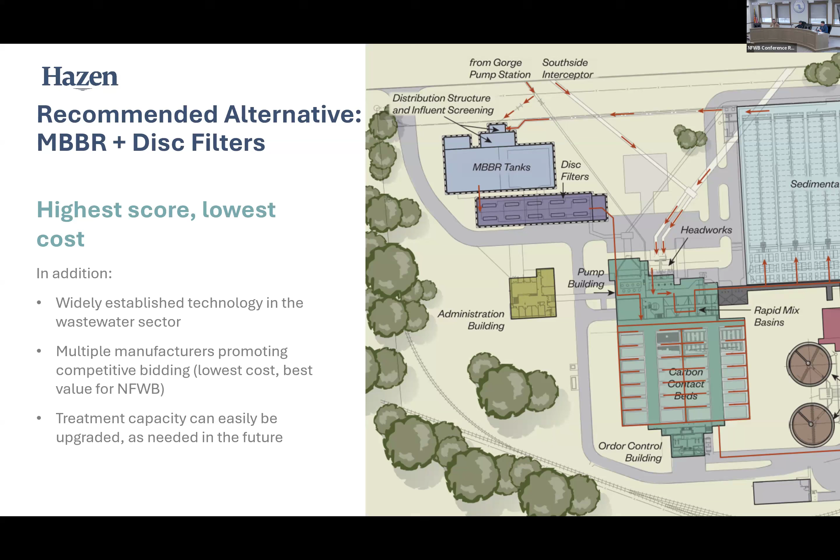So we did talk about some recommendations on the SPDES permit. Sean talked about the BOD, for example. One thing that the New York State DEC added to your draft permit: you currently have TSS. You do not currently have an 85% removal daily minimum. So we are recommending instead a 30-day average, and the same thing on the BOD.

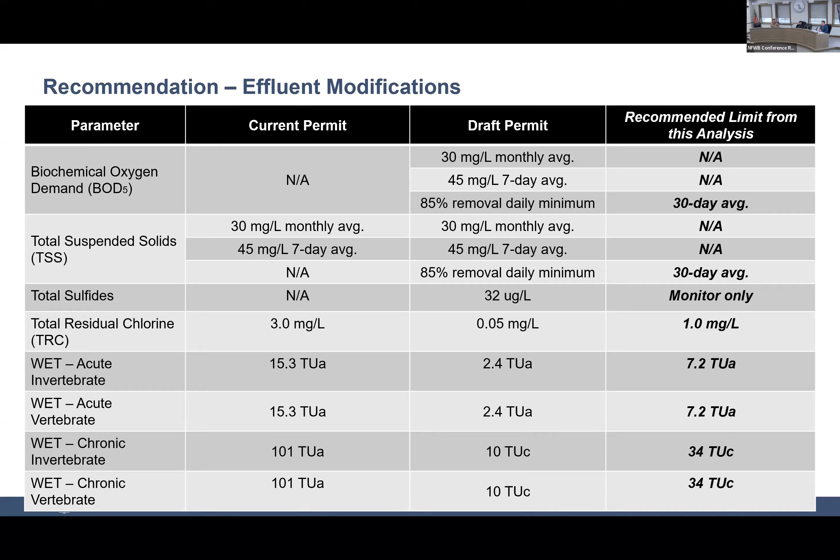This is a very dilute wastewater. It'll be hard to maintain an 85% removal on a daily basis. So that's another thing that we recommended in the report into the SPDES permit. And we talked about all the other alternatives already. So Mark just mentioned what we did is

So I mentioned earlier, we did the condition assessment. We identified what we're calling state of good repair, or SOGR. So those improvements will bring the rest of the plant up to get rid of the deficiencies that exist now. So equipment that's reached the end of its useful life, pumps, pipes, electrical equipment to maintain service for the next 30 to 50 years, like you mentioned. So those improvements are about $40 million.

And in today's dollars, the MBBR and disc filter is about $232 million. And then when you escalate it, as we just discussed, it takes it up to 336 million. And just comparing it to the other alternative from 2019, big thing is it doesn't maintain the GAC, which is required for the number of industrial components as part of your SPDES draft permit. And it's very challenging to construct.

But you can see, not only does it provide the necessary level of treatment, it's constructible, but more importantly, it's cheaper in doing all of those things compared to other alternatives that have been proposed. And Mike, if I could just comment on the MBR. So he's just explaining, because we had talked about the MBR proposal a lot in past years.

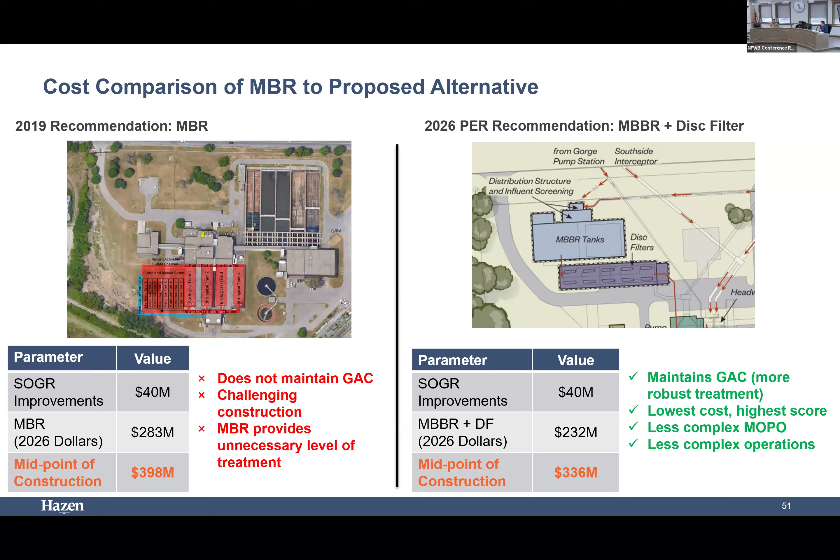But when AECOM developed that recommendation, they were not doing it with the new draft permit in mind. So they didn't know that it was going to be necessary to keep the carbon because of new limits. And they also weren't designing it based on any particular budget. I mean, the MBR at the time would have produced the highest quality effluent, and that's why they recommended it. They weren't considering costs like we are now as we face the imminent need to actually construct some of these things. Thanks, Sean.

We also recommended some additional steps. Number one, there's a resolution as part of tonight's agenda for a hydraulic study. The recommended improvement makes significant changes to the current hydraulics of the plant. So the idea is this study will confirm the existing hydraulics. There's limited information on the existing hydraulics of the system. So this study will firstly identify the current baseline conditions of the plant.

We're proposing to do survey, some water surface elevation monitoring to pick up wet weather and dry weather events to really calibrate a hydraulic tool. Excuse me. Sure. About the hydraulic analysis, I think when you were up here before, you said there was a significant amount of hydraulic flow analysis that you already considered. So I'm hearing something a little bit different, but maybe I'm not understanding the technical aspect here.

Sure. So what I was referring to earlier was the mixing analysis that we looked at before. So the mixing analysis was what Micah presented, where you saw the plume visibly, right? You can see how it's moving to the left upstream towards the falls, and the DEC model showed it going downstream away from the falls. And so that was the modeling I was referring to before. Okay. That was extensive. This modeling here will look at what's actually happening on site, down the street at the plant, and how the water moves through.

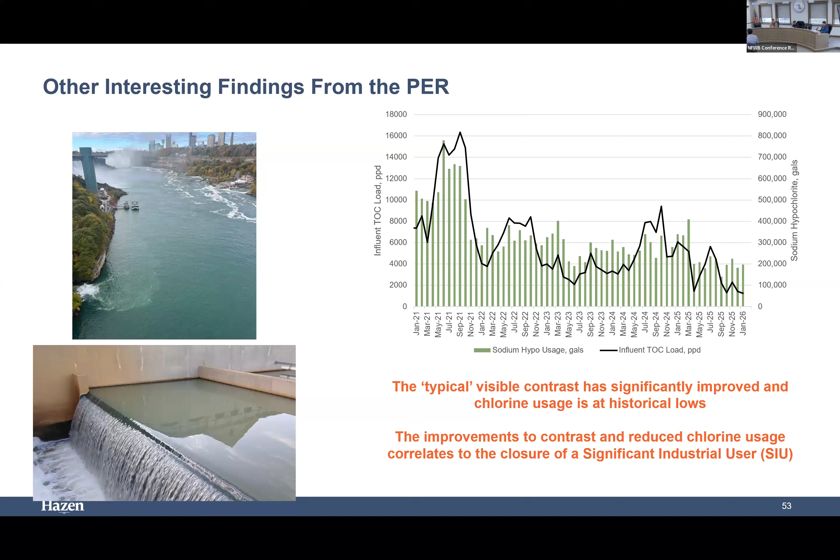And that's why we're saying that shouldn't be a daily level, that should be a monthly. And that's consistent with US EPA. And there are other plants in New York State that also have that same monthly limit rather than a daily. So, thank you. Anything else? Any other questions? Renee, Dan, Matt?

No question. It's just, sorry, I guess we're just in a bad spot, period. And there are no good answers. The bottom line is that I guess this is supposedly the best out of a bad situation, and we're just stuck with a bad situation. And I mean, Sean, what would it take to get DEC to move off of some of the requirements that they've added with the SPDES permit?

Well, what would we have to show them? What we now have presented to them. So we have now Hazen and Sawyer, who has plenty of professionals there. As part of the scope of work under the preliminary engineering report, they got a professor from Rutgers who is an expert on mixing zones, and put together a really strong argument on why the mixing zone as presented is not representative.

And then, we've gone further than that. It's one thing to say, no, you're not right, but it's another thing to say, here's a better way to go forward. So we're really optimistic that they're going to accept the revised mixing zone analysis that has been prepared in connection with this preliminary engineering report effort. And we think that there may be some openness to that.

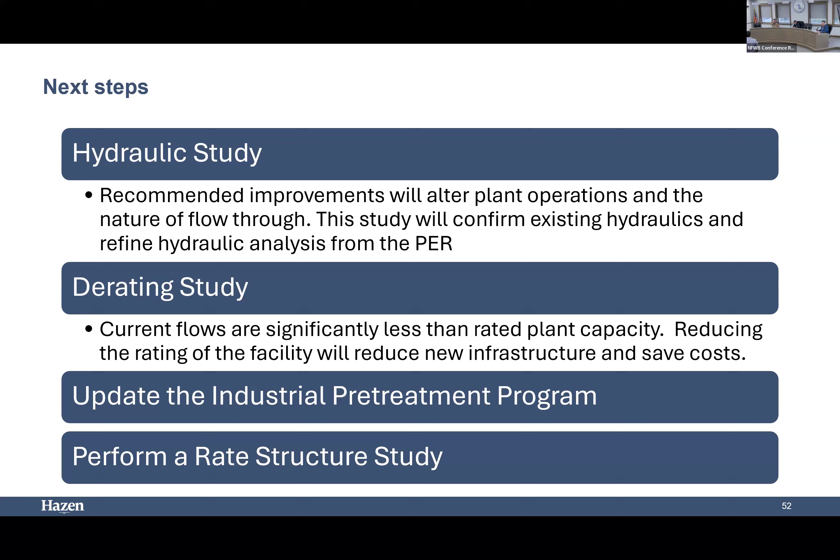Okay, well, we thank you for the presentation and trying to educate us on what's going on. Yeah, okay, thanks for the time. Thank you very much. Sean, did you say you had a few items or no? Nothing that's imperative for tonight. Thank you. Oh, okay.

Under Finance, Deborah Zielkowski. Good evening. Good evening, Debbie. So just a couple updates. We had the Tyler payments meeting last week, and the Tyler payment system is actually live. However, we need to build it out to our specifications and then work on the verbiage of what the actual statements will read. And then we'll do a soft launch, and we will be publicizing it with a press release and inserts, and then we'll put the information on our website.

So we're hoping everything goes live in May, and we'll do a demonstration for April's meeting of how it looks and what the options are. And then for finance, we're working on meeting for the shut off program. That's actually this Wednesday, and we're looking to start that in May as well. It's going to be for individuals who are more than one payment or one quarter behind if it's greater than $300. That's kind of like what we did last year. I think it's probably going to be something similar this year.

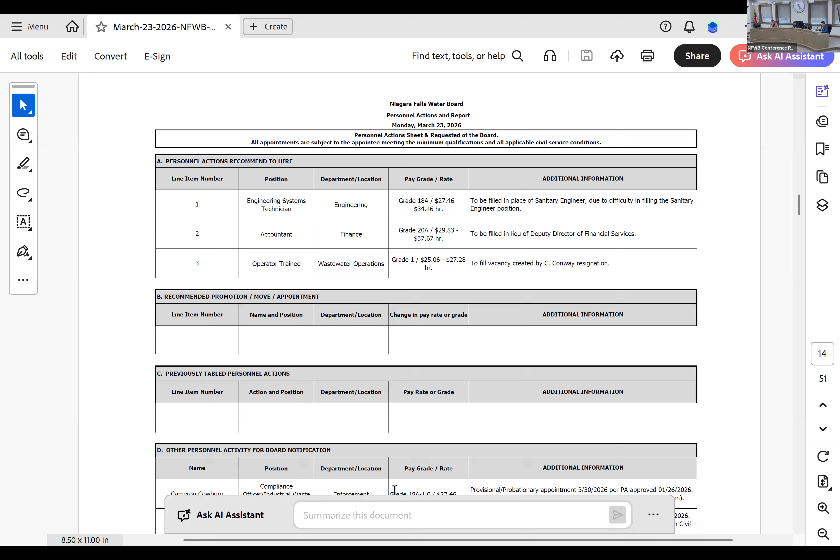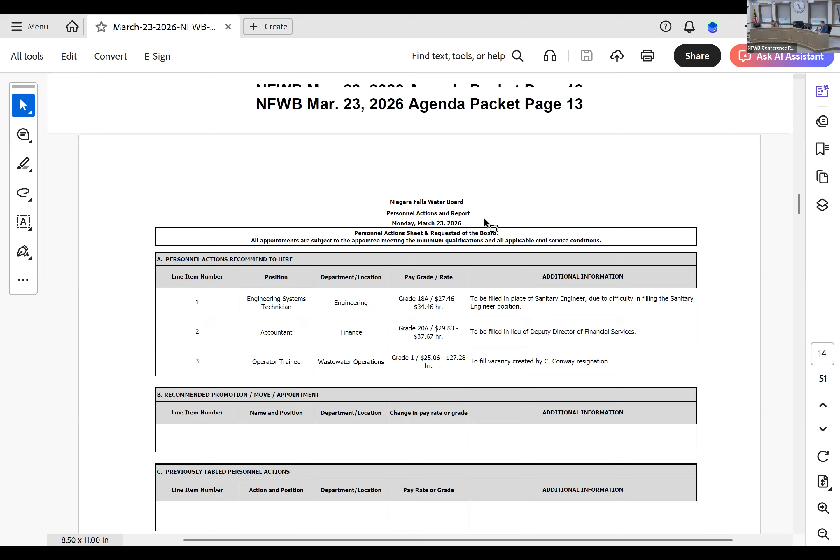Okay. On number 1, is there a motion to approve number 1? Make the motion. Is there a second? I'll second it. Dan, Jim, and then Dan. Any discussion on it? Yeah, this is Matt. Sorry, I'm working off a very small screen. Could you just remind me, please, what is number 1? What's this vote on? Engineering Systems Technician. Okay. You want to explain that, Caleb?

Sure. Like I said before, we currently have posted a sanitary engineer position. It was on a sponsored Indeed ad, and we found that the majority of applicants that we're receiving with related experience just don't quite have the 4 years of engineering experience required by the civil service. And it would be a slight downgrade in position in order to gain an applicant with applicable experience. Understood. Thank you.

There being no further questions, proceed to vote. Roll call. Board Member Cole, yes. Board Member Dean, yes. Board Member Kimball, yes. Board Member Weiss, yes. Chairman Siriani, yes. Motion passes. Number 2, an accountant. Motion to approve. Is there a second? Second. Renee. Any discussion on it?

I have a quick item, Mr. Chairman. Just for clarity, I was listening, Caleb, but I was a little unclear. Is this eliminating a different position or along with creating it? Or just rephrase in simpler terms what exactly this does. Certainly. Our Deputy Director of Financial Services position is still in the operating budget for 2026. It would be replacing that position.

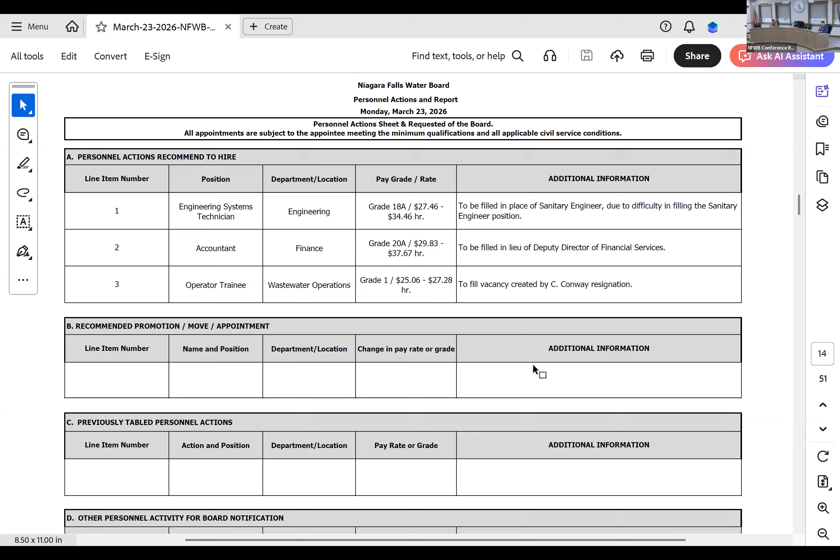Roll call, Sean? Board Member Cole, yes. Board Member Dean, yes. Board Member Kimball, yes. Board Member Weiss, yes. Chairman Siriani, yes. Motion passes. Okay, thanks, Gil. Thank you, Caleb. Engineering, Doug Williamson. Good evening, board. Good evening, Doug.

Okay. Once again, I've got 3 annual reports required by our SPDES permit that are due at the end of this month. The first one, the LaSalle SSO annual report, is submitted due to the requirements of the New York State DEC order on consent in 2008. Basically, it's trying to document how we're going to mitigate SSOs in the LaSalle area.

So part of that, after the mitigation activities are performed, there's a flow analysis that's performed, and we've currently got that scheduled with TechSmith in March. Typically, they look at the reductions in the flows and determine that certain activities are mitigating SSOs.

So Arcadis also, as you're aware, last year performed the phase 2 and 3 SSES work, and they recommended activities for us to perform this year, and then there will be post-construction monitoring next year for those activities.